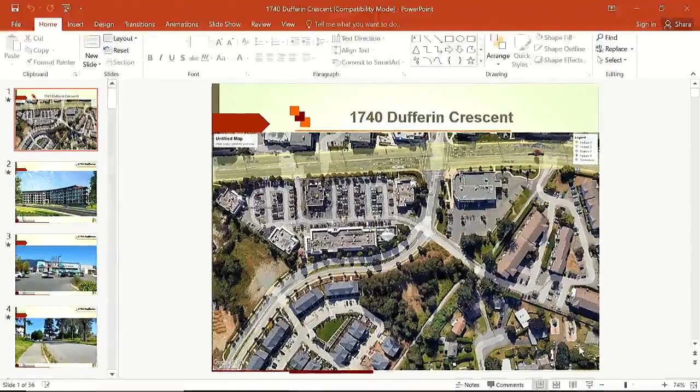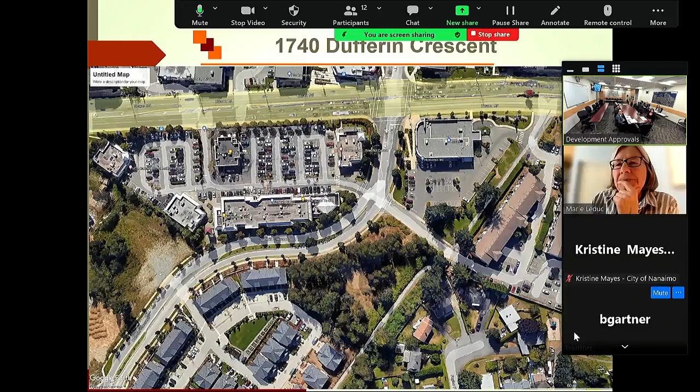Sure, I can start. My name is Dariush Firuzli, architect on the project. We have Mike, owner, with us here, as well as Cara McDonald, landscape architect. And Scott Stevenson is supposed to be joining online. I'm not sure if he's on the waiting room or not.

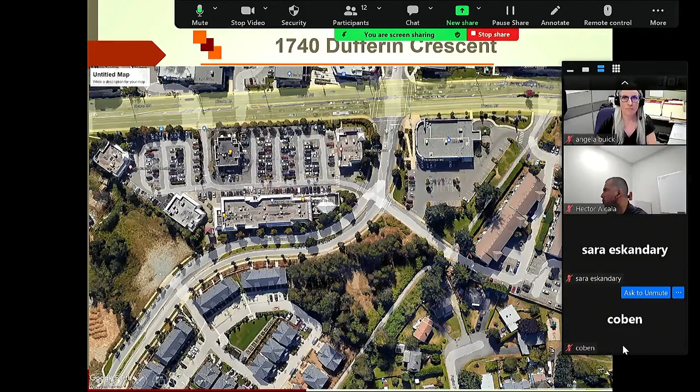With that, I'm starting the presentation. As Kristine already mentioned, the project is 1740 Dufferin Crescent, where Dufferin Crescent starts curving around, right before connecting to Bowen Road, right beside the Rexall drugstore, and across the mall there.

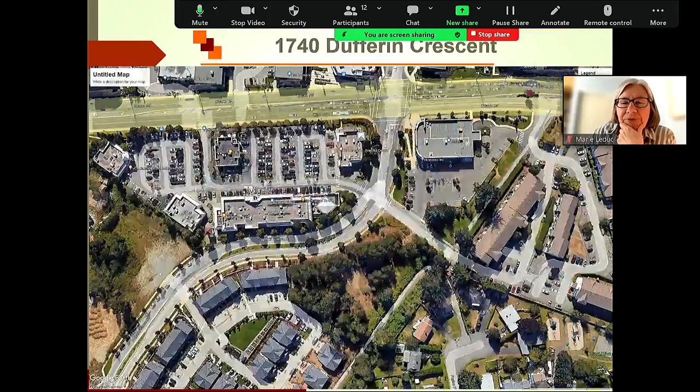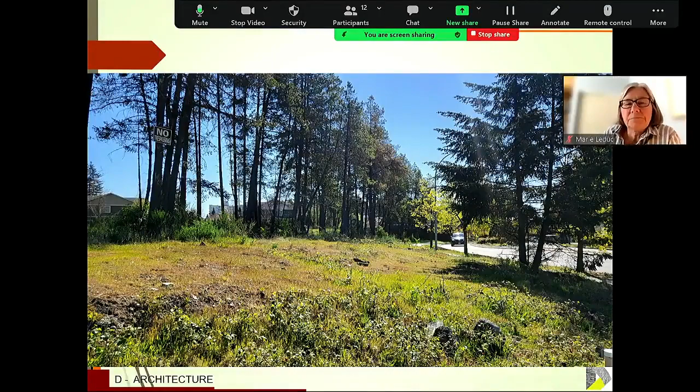This is the property. It is sloped from the north to the south. There are a few trees in the back, on the north side of the property. We do have a walkway, which we're trying to connect to as well.

So, as you see, we do have a mixture of different uses in the area: commercial, single family home, and apartment building. So the proposed building is an apartment building, 82 units. As I mentioned, this curve reflects the curve of the area. They have an entrance on Dufferin and in the back.

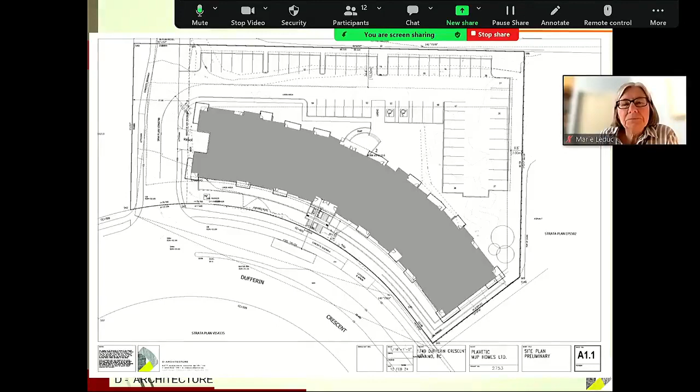Again, that's the curve from a different angle. I will talk about the design of the elevation at the end.

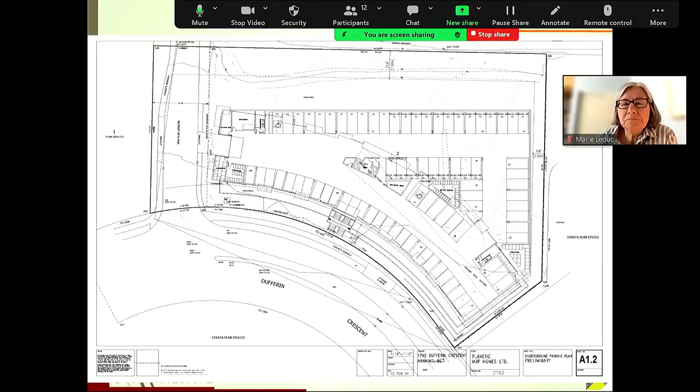We do have a big underground parking. We are a little bit above the density existing at the property, but we're using the underground bonus density to basically cope with that.

With that, we could go to 1.4. We are at 1.3.

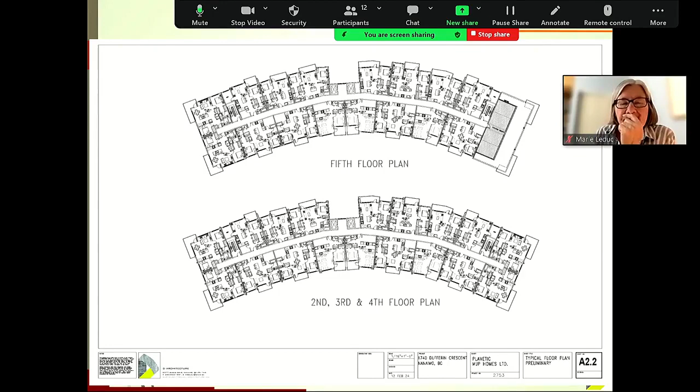The building includes 46 two-bedroom units and 40 one-bedroom units, and in the north corner it's stepping back to respect the neighboring properties.

That's the elevation, and the material is very simple.

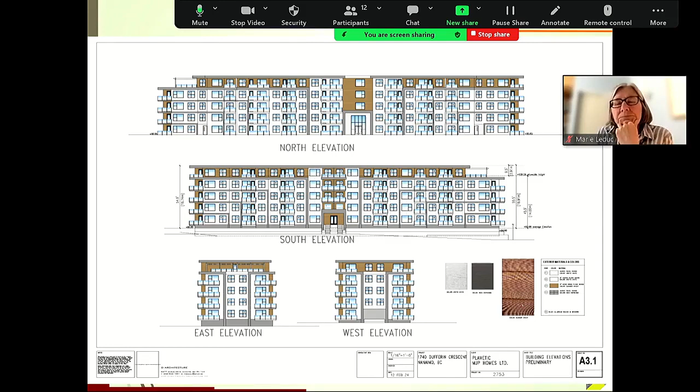Basically, the building is a very white color, and then we have carving to the decks with the wood siding, and some on the top floor as well.

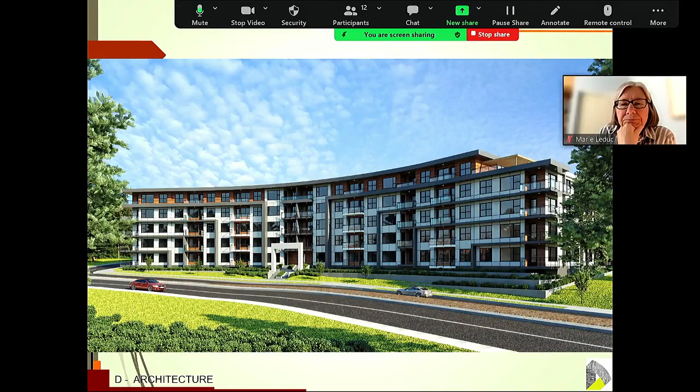We added that wood-shaped siding on the top, with eyebrows in an espresso color, which is the HardiePlank material I believe I passed around.

We are showing the wood grain here, but they are actually going to be a smooth finish. It's not going to have a wood grain on it.

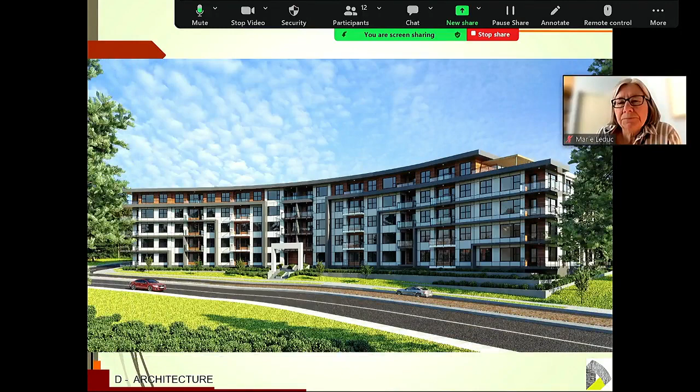Very simple building, not very complicated. We want it to be modern, simple, and easy.

Honestly, this was when I suggested it to the client. They fell in love with the building curve. Then I couldn't change the design because we already built another one.

It has its own challenges with the construction. It takes more time and a little bit more cost, but that's what they want, so it's okay, I will do more work. I'm okay with that.

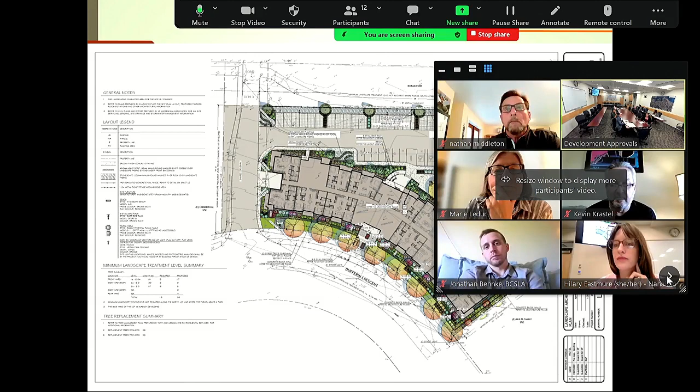Yeah, I don't see him online. Okay, so I do have Scott's report in here. If there is any question for him, I can answer.

Regarding the comments from the planning department for architectural letdown for the access parking area, for sure we are not showing the detail here, but the letdown has to be there. There's a pedestrian conflict with the exiting from underground parking. We will mark out both sides of the exit from the parkade to make sure it's understood. The exit from parking is exactly opposite the Rexall entrance, almost like an intersection, so we'll make it very clear to pedestrians and cars that that's the connection.

The rock retaining walls have already been responded to by Kara, and weather protection was also responded to. I just wanted to explain two things.

One, since we drew this, the 2024 code came in, and with this new code we have to have accessible access to both entrances—100% of the entrances, which used to be 50%. So we have to provide accessible access at the Dufferin Crescent side, which can easily be achieved from the higher side, and also the archway from Dufferin Crescent.

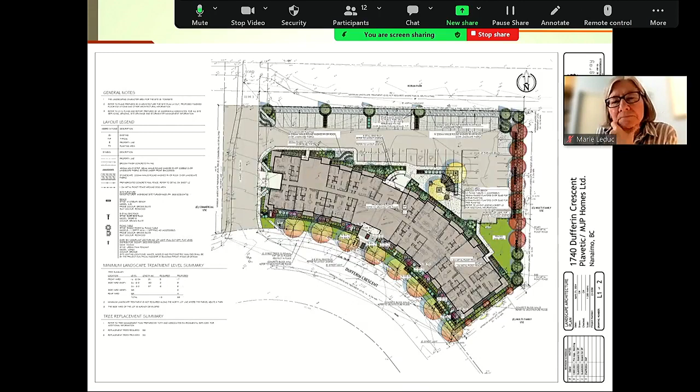I think we did respect the buildings, basically the lower buildings on our west side. We are stepping up. The area where people can actually be in that open amenity on the 5th floor will be separated with a railing, and I can show you in the rendering.

Here you are—if you see, at the end we do have some pergola and the railing separating almost halfway after that step back, so people cannot go right to the edge and will not see the lower floor buildings. That's also a code issue; we have to be less than 60 people up there. But regardless, they will not have a view to the low density building on the west side.

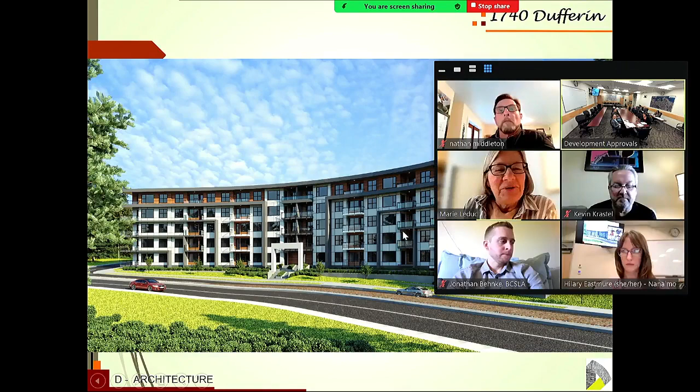I believe I did answer that, and with this I think we're right at 16 minutes, 1 minute over, so we are ready to answer questions. Great, very good, Dariush, thank you. Maybe whoever's managing the screen could stop sharing now so I can see everybody's faces.

Okay, do any of the panel members have questions for staff on this project? Seeing none, I guess we'll just start off here—Kevin, would you like to start?

Yes, thank you Madam Chair, and thank you Dariush and Kara for your presentation. Very nice project—I've been waiting, I know this property quite well, and I've been waiting for something to come forward. I think what you did regarding the siting of the building is perfect for that site. The way you've curved the building relating to the street works very well. The building design, the form and character, works really nicely. I like the soft color scheme, and I like how you use the gray material to create the framing of those box-out areas—that works really well. I really like that.

So really the only thing is what you decide to do with the entries—I think maybe you need to consider a different approach to it. Dariush, did you look at other alternatives, especially once staff addressed it? Did you look at any alternatives in material choices, the scale of it? Did you look at the entries and have any other solutions to it?

So, with a series of slides here — this has been presented more in massing form to council and discussed with administration a couple times. A few of those conversations led to what the developer, myself, and ACE have determined as a desire for a more urban form and look to the building. So that's what you're seeing on screen here. You're also seeing in the lower left the team we have so far: Camargue Properties is the developer, Ace Architecture is the architecture firm, McDonald Gray — whom Kara was already speaking for — and Scott Stevenson from J.E. Anderson Associates. Kara will talk for about two minutes at the end, and I've inserted some comments from the panel throughout the presentation for her to address toward the end.

So we have 53 units, hitting an FAR of 2.3, which is what's in the land use. That breaks down into 7 micro units, 22 one-bedroom units, and 24 two-bedroom units. The developer, Camargue Properties, has other properties in Nanaimo and is skeptical of the marketability of a unit in this area without a parking stall. So currently we're proposing 44 stalls, meaning the 7 micro units would potentially be without stalls, and 2 of the one- or two-bedrooms could also be without stalls. That's as close as they wanted to get. You'll see as I go through some of the challenges with striking a balance on this site.

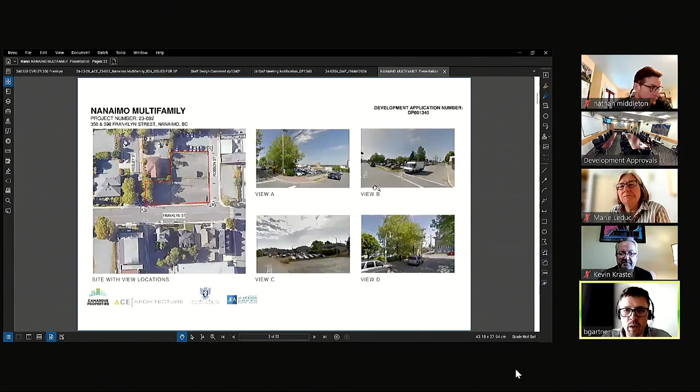A bit of a utilitarian slide here, trying to get the parking balance figured out. You can see the property line in red. We're building out on an urban site, very challenging to get all the asks, so we're fitting in parking stalls, drive aisles, walkways, and the garbage room. Can you guys see the mouse when I move it? Does that make sense? Yes.

Thank you, Nathan. We've got one unit on this floor that could be for a building manager—Camargue is still making a decision there. And then there's bike parking, an indoor bike storage room, elevator, lobby, and mechanical and electrical spaces.

There's also a transformer here, but this blue line beside my mouse is an SRW. The city is in the process of registering an SRW for the sidewalk on this property. So we're giving some of that back, and in discussions with administration so far, we're putting a loading stall in there because of the challenges on this site, for loading garbage and wheeling garbage out. We need to respect the height restrictions—about 5 meters for the envelope of a loading stall.

You'll see in later slides how we're stepping the building back, with inset balconies on the P1 level and the main level of the building. We're also challenged to fit our outdoor bike stalls in the lobby of the building within that SRW.

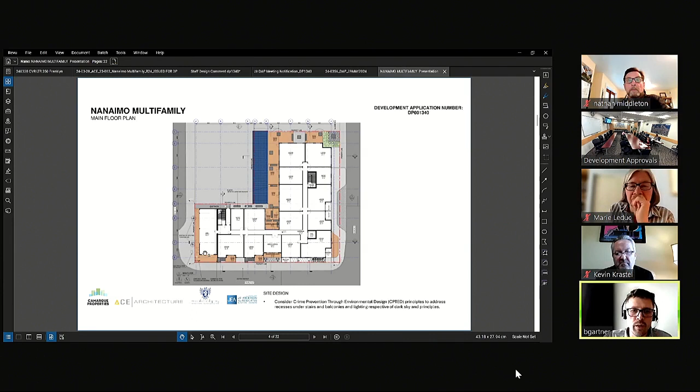So what we're highlighting here is just above the P1 level, moving up to the first level of residential, with the CRU facing Wesley over here. To make a viable CRU, you need about 1,000 to 1,200 square feet in a rectilinear or orthogonal layout. So in order to make that work, we've set back the doors—you can see them set back, with a 1.4 meter setback that I'll talk about a little later.

Generally, the brown areas are what we're calling amenity space for the building. From here, facing the transformer, this will sit on top of the parkade as I come around, and this will all be private amenity—terraces or patios—for the units at that level.

As we come around, there's a unique feature of the building. Typically when you do an L-shaped building, you end up with bad units in the knuckle, so we've separated that out. There will be a glazed wall here with a breezeway connecting the two volumes, allowing us to place amenity space on each floor for lounging, yoga, or a fitness studio. On the main floor, it might be used for offices for Camargue or the building manager. That has a balcony or patio coming off of it, sitting on top of the parkade, with the residential units providing access to grade.

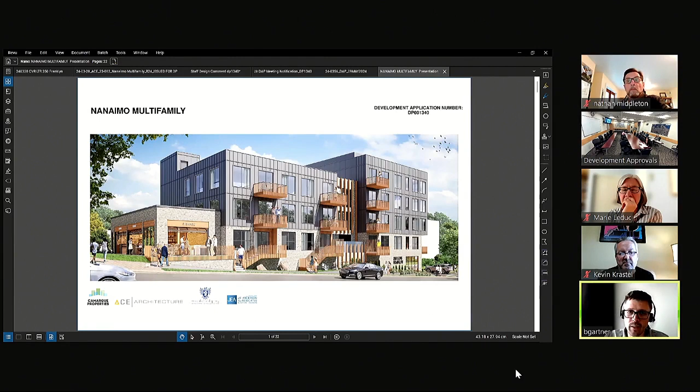There are also some CPTED comments. Going back to the first page, to address that, Kara can talk about the landscaping, but visibility is key in CPTED principles. We'd like to keep the connection to the street rather than doing a Juliet balcony and totally eliminating that. Generally, we're trying to discourage loitering beneath those spaces by using a high degree of visibility on Franklyn.

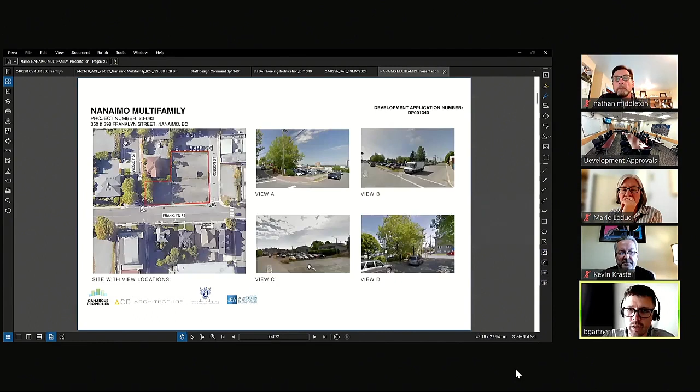The CRU doors won't swing into the corridor. The developer is in discussions with administration on some offsite improvements—I'll call it a bulb for lack of a better term—on Wesley and Franklyn, doing improvements there to help reinforce and activate that corner for the CRU, leading to a more successful CRU on that corner.

I noted there were some comments about providing more of a plaza space. In order to keep that CRU viable, it's at its minimum right now—if it was pushed for more plaza space, I think that would eliminate the CRU from the conversation, and it would just become a residential building, with that space becoming a public plaza.

Here's the takeoffs on the plaza, because I couldn't find a takeoff for what we should provide in the general or downtown plans. So I thought I'd just give you some numbers. It's 50% of the CRU facing Wesley and Franklyn, but there's a 2.6 meter offset from Franklyn and 1.4 to get the doors and provide some loitering and lingering space off of Wesley, so the sidewalk still hopefully functions properly.

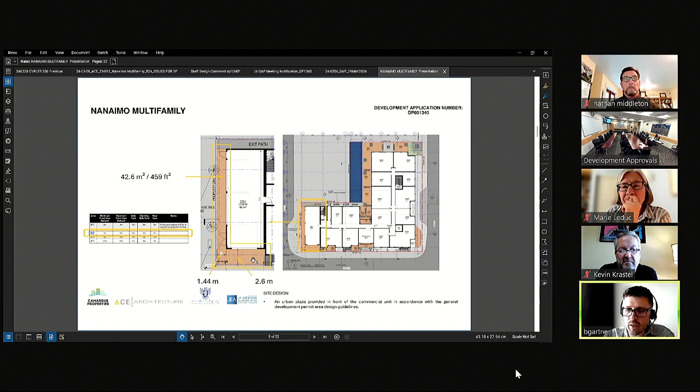For the Franklyn interface, we're hoping to get a few tables out there. Let's say this was a cafe, we could put a few tables out there. I'll also talk about some of the overhang comments on a later slide.

This shows a bit more, cutting a section generally through Franklyn on that grade drop, and how we've pushed some of the massing onto the Robson interface. Generally there's one unit on the P1 level and 3.5 to 4 stories of residential with the CRU facing Franklyn and Wesley.

I'd also point out the comment about covering the bike stalls - I'll leave the CRU bike stalls for a better image later. But when I was talking about the loading stall and the sidewalk, and registering the easement for the SRW, this is what I meant: we've set the main level and the P1 level back off of Robson to allow clearance for that loading stall, which keeps the envelope above. Scott's done some work on that with the city's engineering group, and we'll continue.

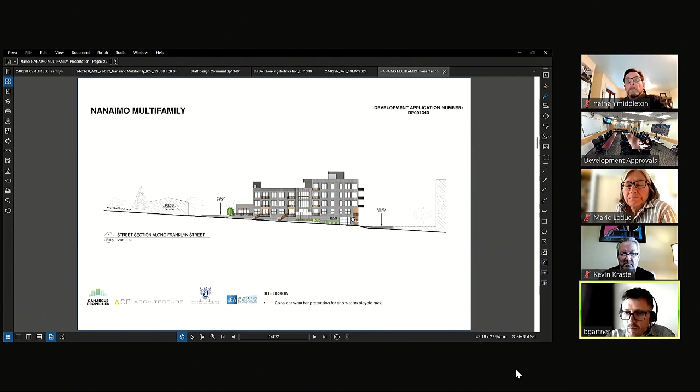So we're considering weather protection for short-term bike racks - there's that. And here's a zoom in on the two corners.

Generous glazing for the commercial unit - we've provided quite a bit of glazing with glazed overhead doors or glazing panels in overhead doors. Those spaces for a tight CRU could open up to the street on a nice day, creating that indoor-outdoor space, with the option to close it in bad weather.

We're a little nervous about going too far with the glazing, even though we've gone far enough to almost fully glaze two facades, because we're trying to hit Step Code 4 for this. It ties into some of the funding Camargue is chasing for the property, but Step Code 4 will really limit us on thermal breaks and massing jogs and things like that, so we have to be careful as we get into the engineering. I just want to make sure I fully address this.

Ground floor commercial, and for the residential we've tried to set that back as well. If we could get beyond the SRW, there's about 2 feet of tolerance right now where we've set this building face back of where that SRW blue line could go. We're giving ourselves a little tolerance as we get into the structural considerations for this site, to see what we'll need for shoring potentially along Wesley.

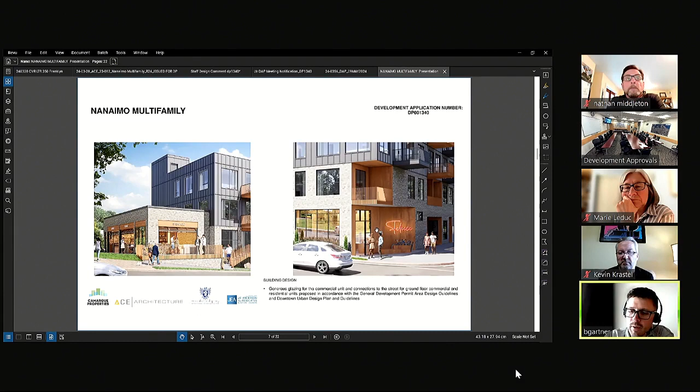It's not a lot of room, but I think what we can take away is that where those bike stalls go, we'll absolutely try to cover those - I think it's a good suggestion. They'll also get some cover from the balconies above. I know it's kind of high, and if you had a rainstorm coming in from the Robson side, hopefully you can get under there, but hopefully that helps.

This is also takeoffs on the two plazas, so trying to fit maybe some benching in there. It's a bit of a balance again - it goes back to that sort of setback and loitering consideration, like how big do you make it without making it too big in a downtown setting. That's the balance we're trying to walk with the developer, and discussions with Bill's group to date have been around that as well.

So, strengthening building corners - that's what we're trying to do, given a very tight urban condition.

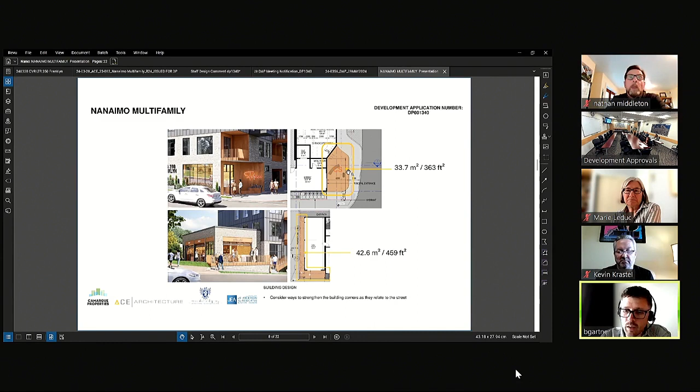Here I did want to talk about the interface where we're looking at the CRU facing Franklin. Given the comments, we consider weather protection for the commercial units, so maybe something that fits the modern look, like an awning or a small projection that helps protect those glazing units. We're totally open to that, so we'll take that away and look at it.

The other item is incorporating trellises for vines, which we'll try to do where possible. I might let Kara talk a little bit about that, because I think she's had her challenges given the planting beds we provided.

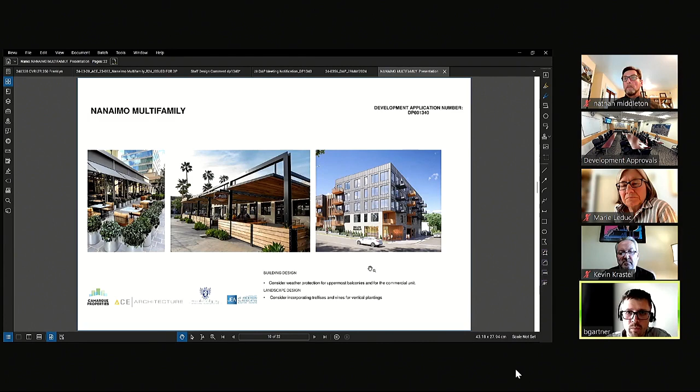And then, uppermost balconies - this is a good image to talk about that, where the developer is actually hoping for a different product on the upper floor. We're stacking that, we've got views of the harbor, and putting a cap on that, especially from the interior living space, would just narrow that big expansive view on the upper floors and give a bit of a wow factor. So we would prefer not to do that. Plus, as I said before, with step code and thermal bridging, we're trying to minimize our apertures in the envelope. So that's our take on it, but we're open to what the panel says here.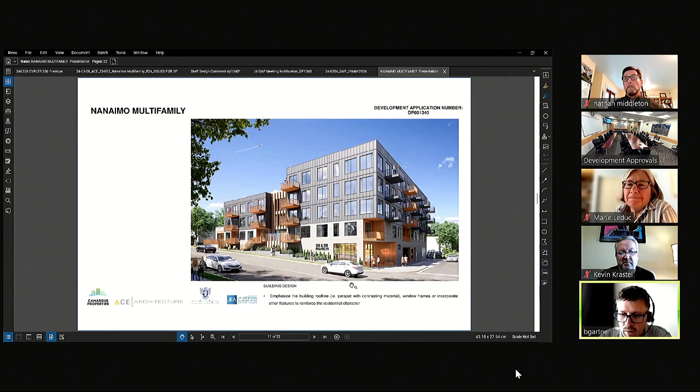Window frames incorporate other features that reinforce residential character. We could look at doing something in a casing there, or some way of framing those out to give it a bit more residential feature. As I said before though, we were trying to go with something more urban, less typical, even less residential character, but I'd be interested to hear what the panel's thoughts are on that.

For bike storage, we'd consider long-term bike parking for the commercial unit. The developer would make indoor bike storage available for staff working in the CRU. I think that's a great solution, rather than providing separate storage, or as part of the tenant improvement, whoever goes in there could have room for bike storage within the unit.

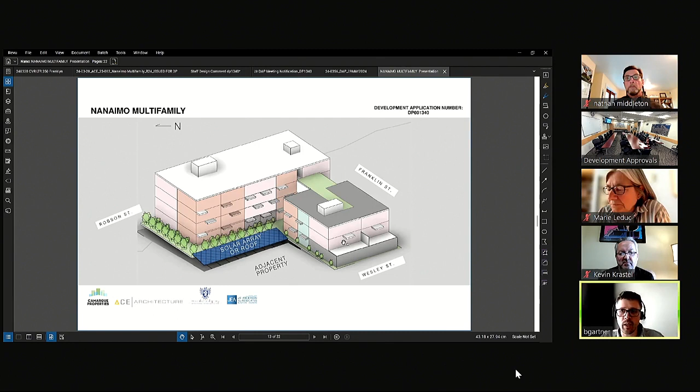This is an early image. I wanted to talk about the step back and massing to give the history. This was an image we showed during the council presentation. Right where my hand is, on that facade, we had an extra unit - 4 units total, those pink or purple units on the corner - which overlapped the CRU below. Some of the comments we took away from that conversation with council and administration was to really reinforce that 1-story character on Wesley, so we've taken those units out.

Those 4 units went away. As I said, the balance of parking stalls to units - the developer is a little more comfortable with that, because it's fewer units they have to offer without a parking stall. This is another image of that early massing.

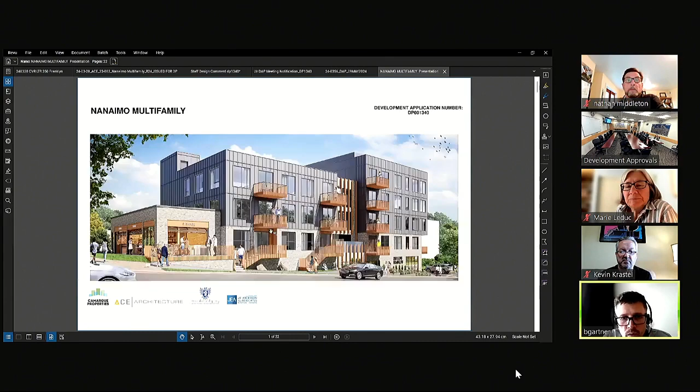I'd also point out, Robson, we've tried to keep more of the utilitarian elements, as I said - loading stalls, parkade access over in this corner with the transformer, residential on the corner - that's probably clear from most of the slides. Just noting what happened with my push back to the beginning, sorry if that's making anyone sick.

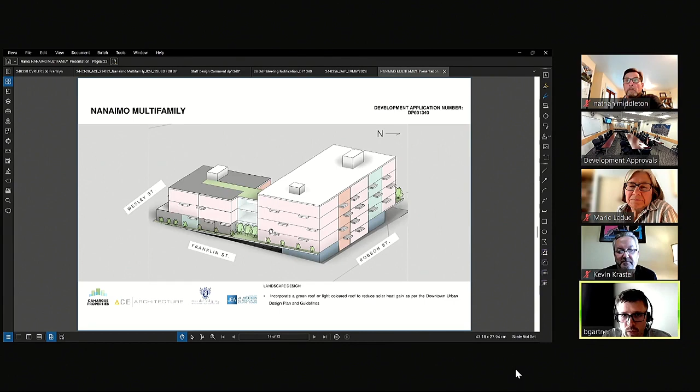Landscape design incorporates light coloured roof. We're trying to do solar panels where possible. Absolutely, we will - like a TPO white, maybe an SBS - but we'll be looking at ways of reducing solar gain. 100%, thank you for that comment.

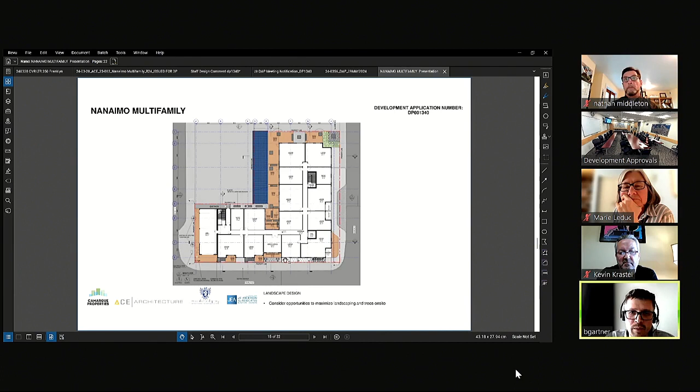On landscape opportunities, I'll let Kara talk about this a little bit, but I wanted to point out that on this rooftop of the parkade, we don't want to make apertures in the envelope, so we're doing planting, like planters on top and fitting what we can in those. You're seeing those as the dark gray right now, where we're planning to create some division between the units - more of a green screen, an organic or bio screen, between the units - and creating places for them to have ownership over and plant. So we're doing what we can. Kara's maximized what's on the ground, but certainly wasn't given as much real estate as the previous project.

And I'd turn it over to her now if she's still there. I don't have my camera - I am here, and I'll be even less than 2 minutes this time. Thank you, covered a lot of it here, the renderings I think explained everything.

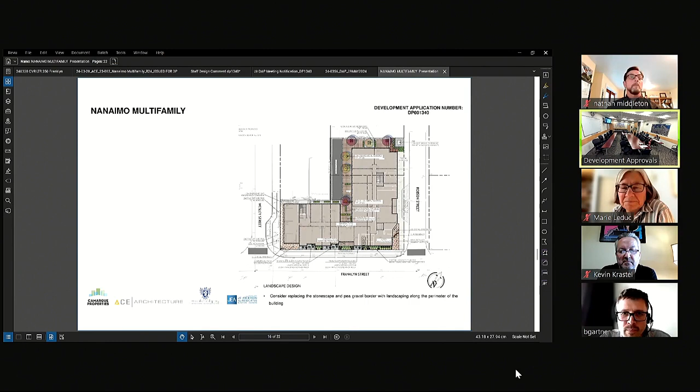So the project is in the old Nanaimo character area. Along the Franklin Street frontage, we incorporated formal rows of columnar evergreens, ornamental grasses, shrub roses, and step planters. Where patio stairs and balconies do not allow for planting under cover, we use Stonescape with landscape boulders as a deterrent for occupying those spaces.

I've never seen really any luck with planting that's covered, just because it does need water when the irrigation system is off, and it doesn't get any in the winter. That said, we do have some shade-loving, dry-loving plants we could give a go, maybe even ones with prickles, that we could incorporate into those Stonescape areas.

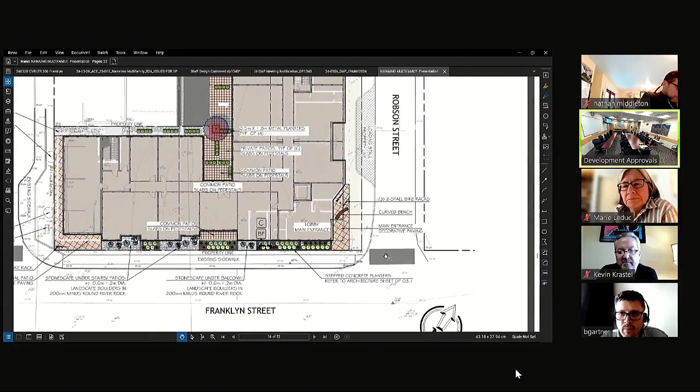The main entrance at the corner of Franklin and Robson incorporates decorative paving, a bench, and bike racks. Along the commercial area on Wesley Street, we've indicated decorative paving and a single bike rack in an effort to maintain access into that commercial patio area.

Around the PMT, we again have incorporated our shade-loving indigenous plants to screen. The private patios on the north and west sides over the parkade are defined using raised planters, as discussed.

The client wasn't keen on having a whole lot of planting over the parkade. So we've used raised planters with evergreen hedging to screen between the patios, and trees and planters are located where space permits to provide interest, some shade, and some color.

Additional planting areas and trellises with vines. I feel like additional planting areas are probably not in the cards, but we could look at some trellising on the Franklin side of the building, possibly around the sign. I was seeing in your renderings there, maybe there's an opportunity to put some trellises there.

And that's it for me. Thank you.

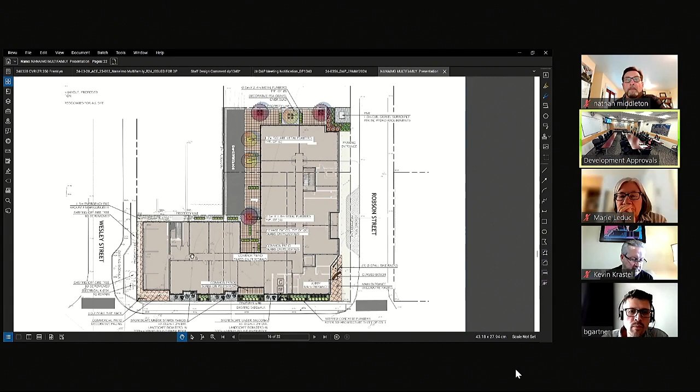Thank you, Kara. Just going to see what else I put in here. Some site sections, just to help.

This is looking at the back. That's the CRU. These are the elevated patios and terraces coming out of those units. Parkade down below.

Another section. This would be the parkade door out onto Robson, looking at the Franklin interface with the planting bed that's there and how the parkade sort of tucks in underneath that.

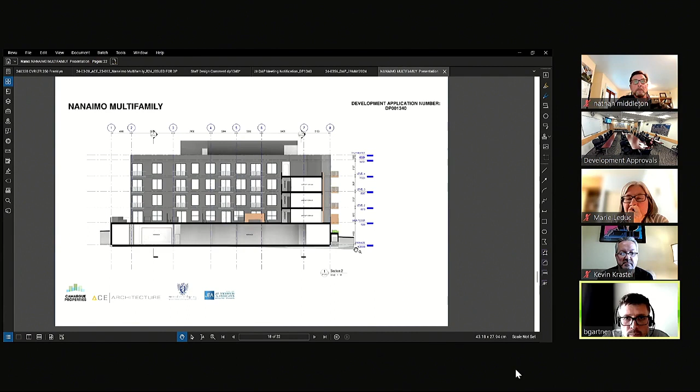This does show the amenity space, so I think that's a nice section to show that, how the corridor flanks the amenity space, with the amenity space between the two volumes. As we said, the corridor will look out over that sort of internal side of the L.

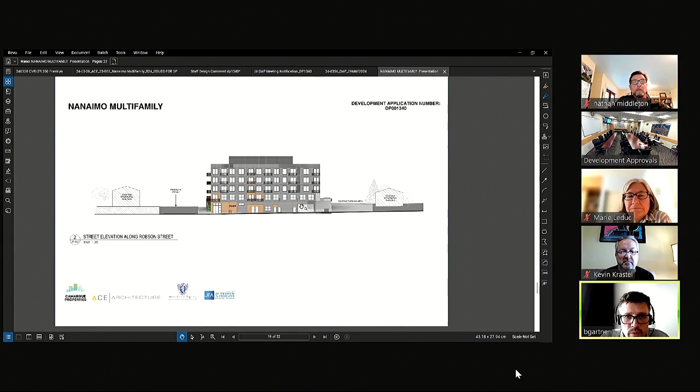This is a Robson Street face. Just there. Material palette. So near grade, we're proposing...

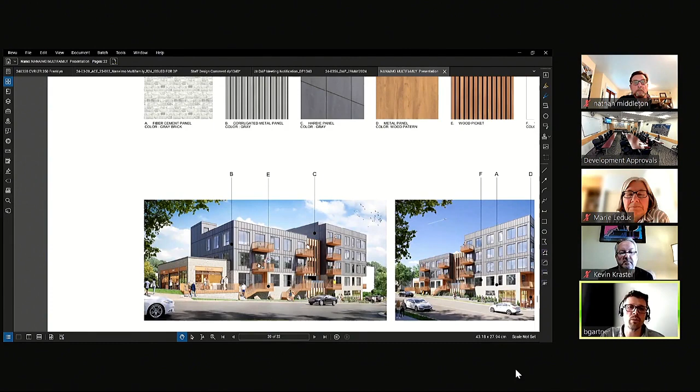Still looking through the energy modeling to see if we're going to need exterior insulation. So for now, we've proposed a fiber cement panel that will look like gray brick, as opposed to a full bed brick, which would be very difficult and expensive to do exterior insulation with.

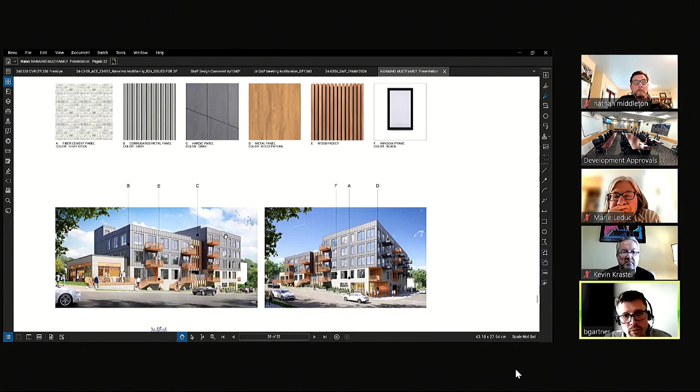So that's what you're seeing near grade, all the way down to grade from the main and on the main and P1 levels. A corrugated metal panel or metal panel above that on the street faces, facing Wesley, facing Franklin, facing Robson. Hardie panel on the interior side, as you can see, sort of the transition here, and then...

Metal panel, wood, wood pickets, and black frame windows. So a very, very simple palette, trying to make the economics work for the developer.

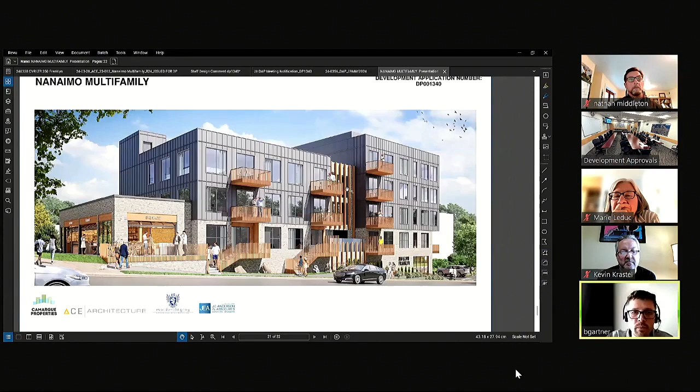That I believe is it. Yep, thank you. Great, thank you very much.

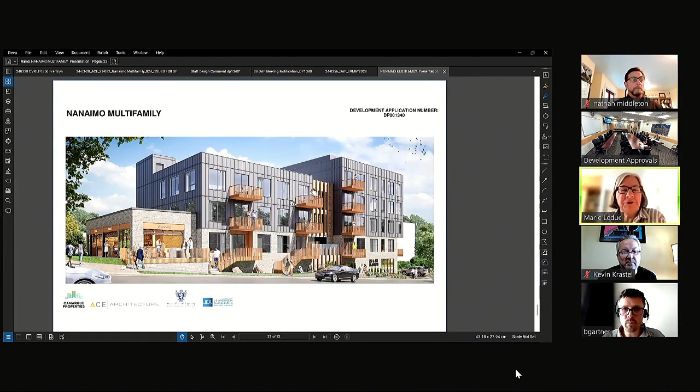Okay, seeing none. Wondering, Nathan, you'd like to get going? Right, sure. Kevin has a question. Oh, sorry, Nathan. Sorry, Madam Chair.

I have a question for staff. Christine, you mentioned the height variance is whether or not the rooftop area is going to be excluded from that. That means that if it's not excluded, it's going to be an even additional height restriction. Can you just kind of clarify that, and also what measures will need to be considered to have it not included in the height?

Sure. So Section 6.8 of our zoning bylaw has height exemptions. We allow a portion on top of the building for a number of different items. It can be elevators, stairs, and in this case, enclosures for sustainable building technologies, which is what is being proposed on the top. So it looks like, from the discussions I've had with the applicant preliminarily, that it exceeds the 10% that's allowed. And so it would have to be reduced, or a variance would have to be sought to increase that percentage allowable for that height exemption.

Thank you. Okay, go ahead, Nathan. Thank you, Madam Chair.